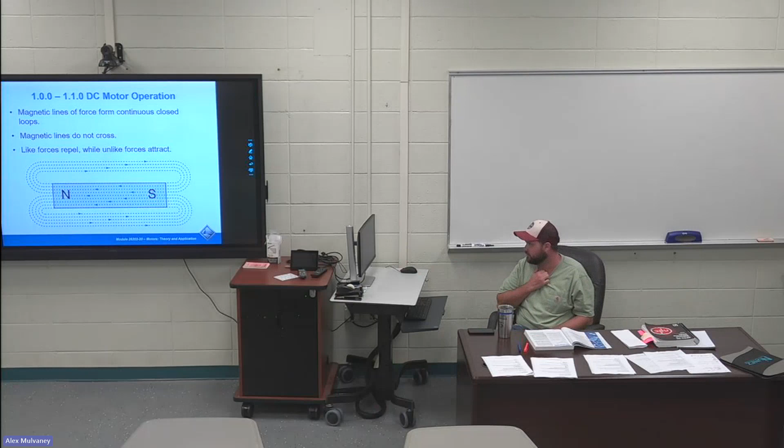Pretty much, motors are pretty much electromagnets arranged in certain ways to create a spinning energy. It's essentially all that they are, and they've just come along further and further with how they're made. How they're made has been the same for a while, but they're becoming, especially DC motors, more and more efficient. But definitely super important in industry and stuff. I don't see you guys rebuilding motors, but it is important to know the components and characteristics of how they work.

On page 1, I don't have any of the trade terms highlighted, but if you look through there, those are a lot of the things that he talked about. You should know that armature is another name for the rotor, the part that actually moves on the inside of the motor. Commutator is what connects the electricity to the motor, essentially, with the commutator and the brushes. All motors are going to be rated by their horsepower. RPMs are important, you've got to make sure you get the right type of motor. And then he talked about rotation.

My only highlight on page 1 is 110, how DC motors operate. Third paragraph is highlighted with the second bullet point: there are several characteristics of these magnetic lines of force that must be remembered when dealing with electric motors. They are the following: magnetic lines of force do not cross.

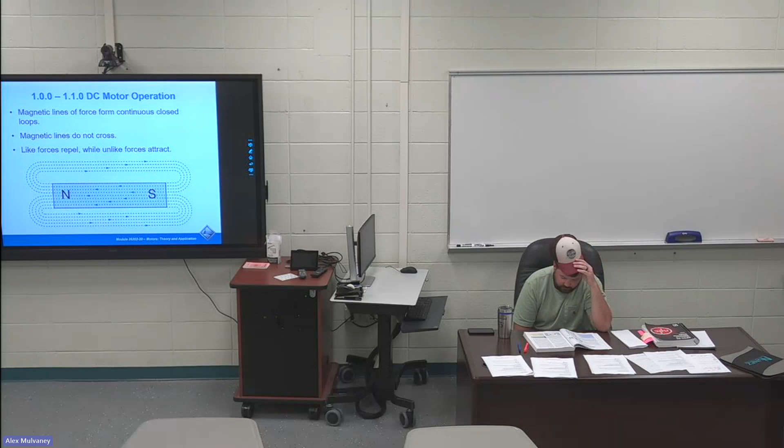How is the armature, at least in the video, made up of? What was it made up of? Laminated sheets. Why were they laminated? To stop eddy currents. Not to stop it completely, but to limit, reduce it to a smaller area. Eddy currents are a pure loss — that's one of the losses of an electric motor. Electric motors are super efficient and stuff like that, but that is one of the losses of an electric motor.

Page 3, I've got the first sentence of that note highlighted: the brushless DC motor was developed to eliminate commutator problems in missiles and spacecraft operating above Earth's atmosphere. So usually that type of technology trickles down — they started with NASA and stuff like that. Anybody know any other inventions that trickled down from spaceships, or not spaceships, like NASA or anything?

GPS. I mean, that's part of it. Satellites. So even simple stuff like Velcro is NASA. Like that's a big one that just trickles down into stuff.

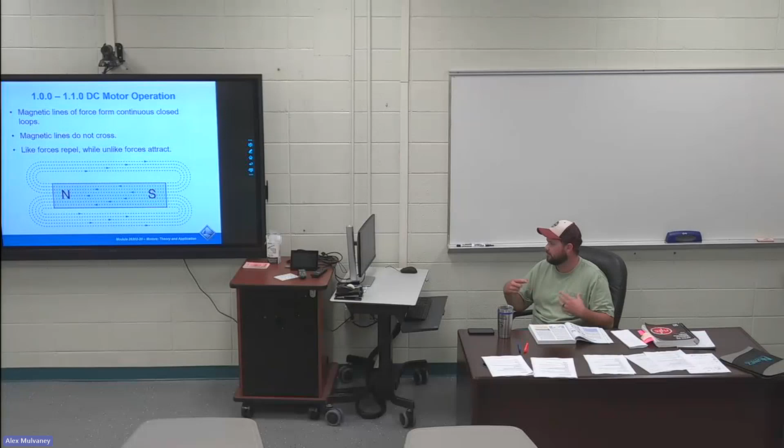But yeah, definitely brushless DC motors are a big thing because, like it showed, brushes are connected to the commutator, which is connected to the slip ring, and those were made of a carbon material. As they hit those grooves, that wears them out over time, and they can be replaced. You usually find by the time somebody decides to replace them, there's nothing left and there's damage to the commutator, but they do have the ability to be replaced. But brushless DC motors are probably what everything's heading to, at least on the smaller side of motors, within the next decade.

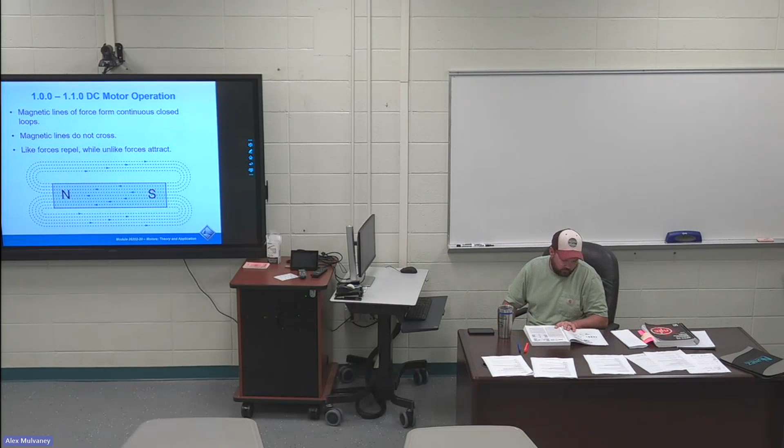Flipping over to page 4, you can see the different types of brushes. If you're looking up on the board, you can see how they all have a radius on them in order to touch the commutator segments, and then a spring with a wire on it. So this is what the actual electricity is flowing into and out of for the motor.

You can have your commutator segments. They had just 3 different segments, but you can have multiple different segments, like the video said. The more you have, the more windings you have, the smoother the operation is, especially if you're running at lower RPMs. But they usually have some form of spring. I've seen this mechanism mess up before, and this is a hard one to fix. Some of this is kind of little flimsy metal. The spring is different on most of them that I see.

All it takes to change the brush is to take this little clip off, move the spring, and the brush pulls right out, and you can change it. But there's different types of brush holders. This is the clamp type, which is usually the type that, at least that I've seen in motors, but it's usually all smaller type motors.

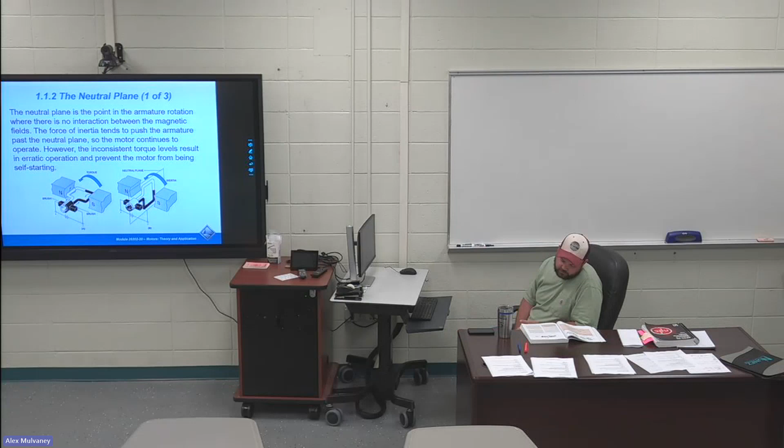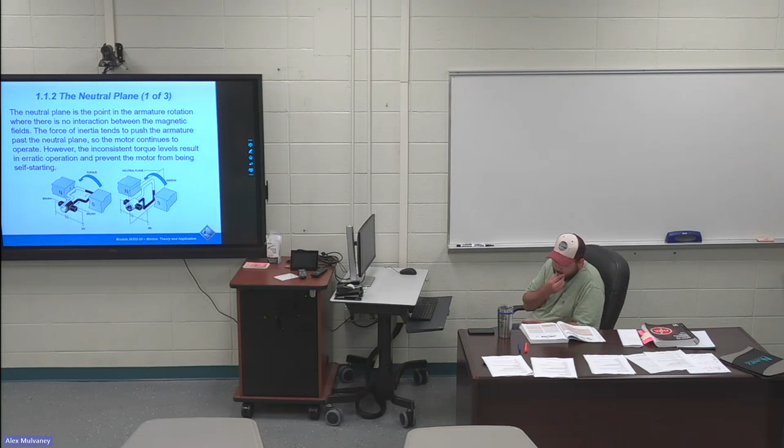Counter electromotive force, CEMF. Second sentence is highlighted in 114. The magnetic field is produced by the field poles, and a loop of wire in the armature turns and cuts this magnetic field. So on the video, they just had a north pole and a south pole magnet. Other motors have multiple magnets, not just on the horizontal, but on the vertical plane as well, to keep that thing spinning. But yeah, it's just talking about the field poles, magnetic lines of force being set up for the motor.

Page 8 and 9, they go through kind of what he did. I don't have any highlights on either one of these pages, but it goes through and talks about the lines of flux and which way they're pushing. And then once you start running current through the armature, it forces the motor to start spinning and things change. He did a good job of going through that, but you can see right here, they're starting in the neutral plane, but as soon as that armature turns, you can see these magnetic lines of force are changed. It's crazy. Even watching it go semi-fast on the board, that is a minuscule fraction of how fast this stuff happens.

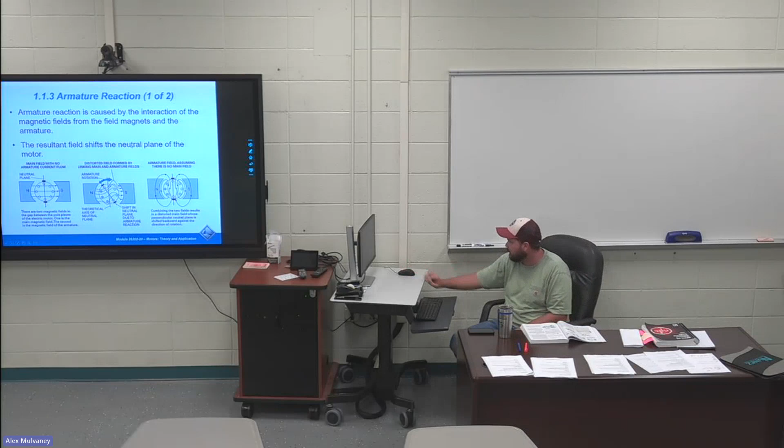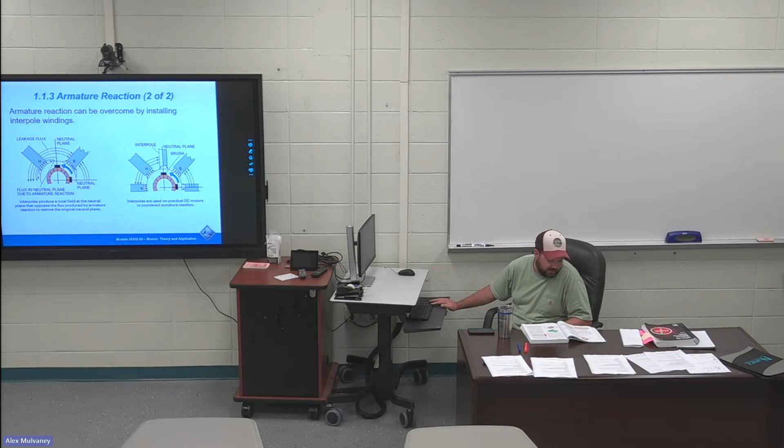Moving on to page 10. One equation that is important is horsepower. Figuring out horsepower, I've got horsepower equals watts over 746. So if you're wanting to convert your electricity into a horsepower number, you can take your watts divided by 746, and that gives you horsepower. 1 horsepower is 746 watts.

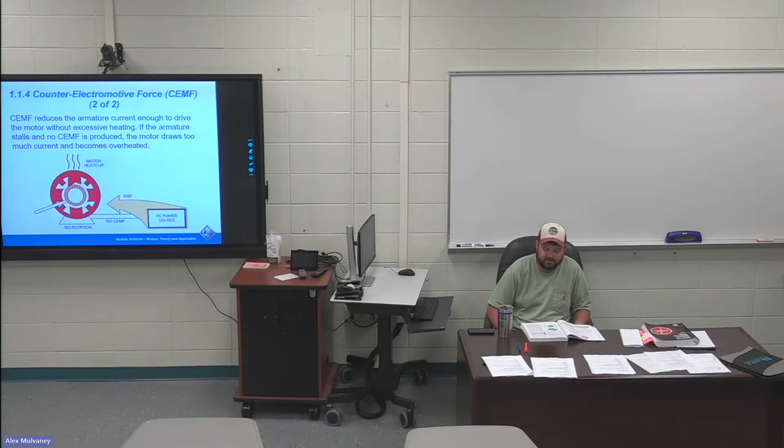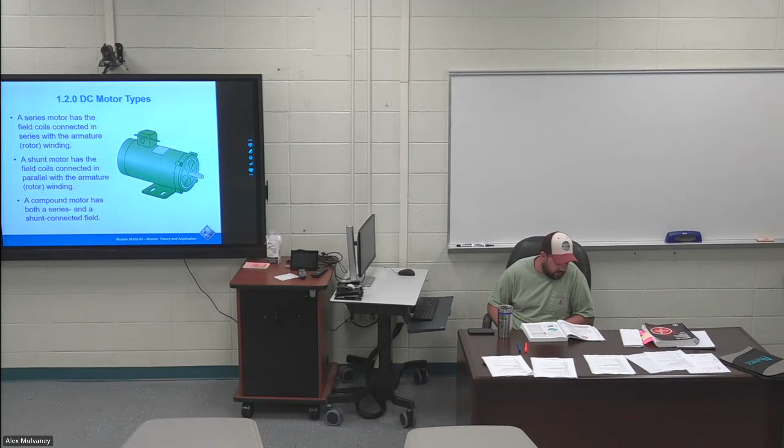DC motor types, a bunch of different types, and the different types vary on how the motor windings are wound inside the motor, how the armature is set up. There's different advantages and disadvantages based on how this is done. Page 10, DC motor types, third sentence is highlighted. The shunt motor has the field coil connected in parallel with the armature or rotor winding.

Pretty much means there's a big coil on the outside that's connected to the brushes and the commutator. Anytime you hear shunt in the electrical field, that just means a separate path for current to flow to create something. Because we know we add resistors and stuff to circuits to control the voltage in a series circuit, so they're doing the same thing. The main two things for a motor are speed and torque, so you can play with your speed and torque values by using a shunt DC motor.

It's not a bad thing to read through the operating characteristics of a shunt wound motor, because they're fairly common. But you have torque, speed control, and speed regulation. None of those are highlighted, but it wouldn't be a bad thing to read through. I have the last sentence on page 11 highlighted. This motor is suited to applications that require a relatively constant speed over a wide load range.

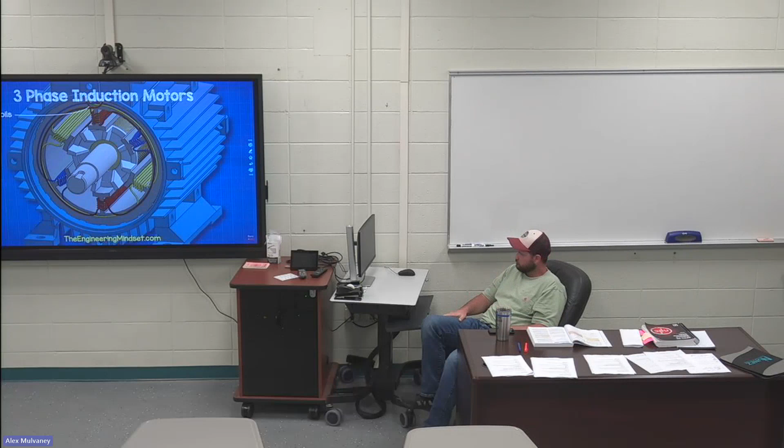So in a DC motor, the electricity is passing into the moving object itself, and then you just have stationary magnets on the outside. So the armature is actually, the electricity is actually pushed through the armature, and that's what makes it spin.

An AC motor is different. The electricity passes through the stator, or the stator casing housing, all kind of interchangeable words. The electricity is passed through that, which makes the rotor spin. It's important that in the AC motor, this is called the rotor, not an armature. So this is just a rotor. In the DC motor, it can be called either one, but in an AC motor, it's called the rotor.

Not important, but did y'all know in World War II they found spies by making everybody say the word squirrel? Squirrel. I just noticed it because the way he said it, like a lot of people in Europe and Germany and stuff like that can't say squirrel like we do.

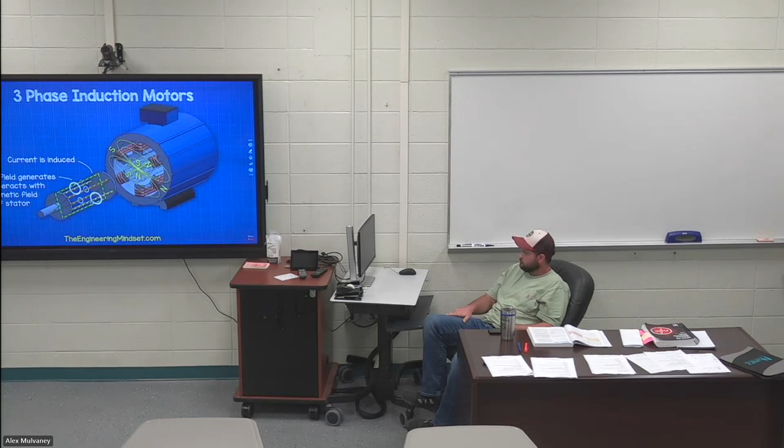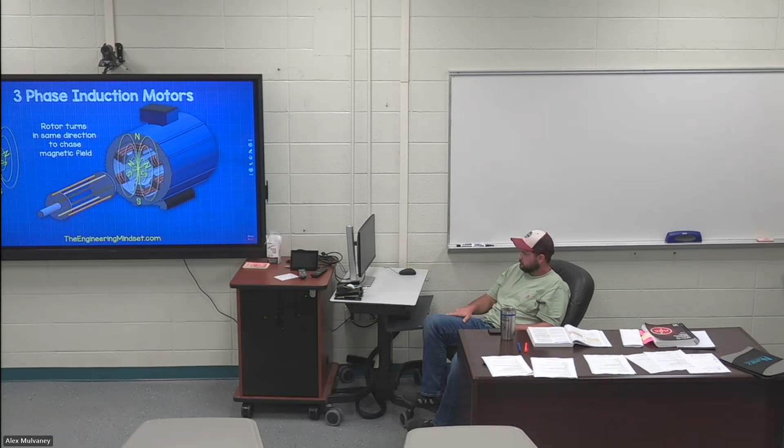So that's going to be important. Like it's always like if you see this arrow right here, this would be your rotor. And it's always like the rotor is trying to catch up with the north, like the end of this is going to be a south pole, and it's going to be trying to catch up with the north pole. But the north is shifting constantly, and it's never going to. The north pole is kind of pulling the south pole along the motor. It's kind of how it works.

And then just so you know, the speed of the changing north pole around the motor, sounds weird, is the synchronous speed. You can get synchronous speed motors to where it's locked into a constant speed, but we'll talk about that. But just know that the speed of the north pole and south poles changing around the stator is known as the synchronous speed.

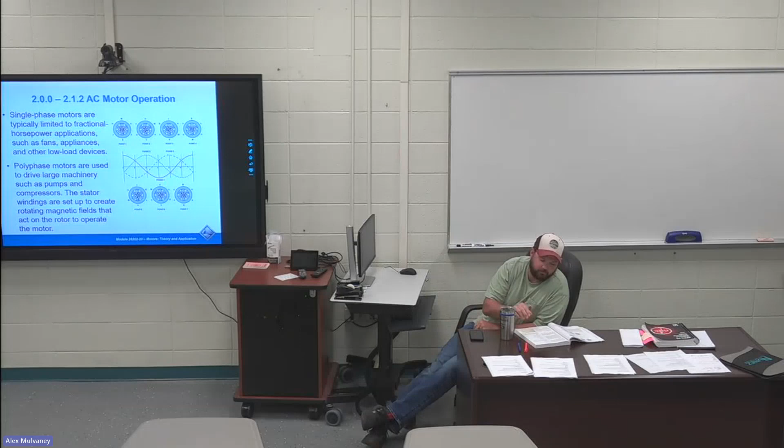Page 17 talks about different characteristics of motors: induction, torque, slip. The slip is the difference - remember I talked about synchronous speed and how the north magnet follows around and the rotor is trying to catch up with it. The slip is the difference between the two. I don't know that I have a highlight on that, but it's good to know the definition of slip. Not all the math on there that figures out what slip is - who cares? I don't know who does that math, but it's not important until some point.

I don't have anything else highlighted on page 17, or 18 and 19. Starting current, this is important - the starting current when you start a motor is the highest it will be, and it's a lot higher than at synchronous speed. So you have your graph on page 18.

The first, it's called locked rotor torque whenever you start up a motor, and that's just because the rotor is stationary. Until that thing gets spinning, the faster it's spinning, the more inertia it has, the easier it is to spin almost. But whenever it's dead stop, even starting with some type of load, whether that's a fan or pump or whatever on the end, that's where you get your highest amount of torque required, which means the highest amount of electricity required, the highest amperage. That's why motors trip out on initial startup sometimes, or it can mean a gearbox has failed with too much torque, or a bearing has failed causing that initial torque to spike.

But you can see starting torque right here - you have to have the most torque right here, and then once that motor speeds up all the way to its synchronous speed, it doesn't require as much torque. I guess it does talk about starting torque.

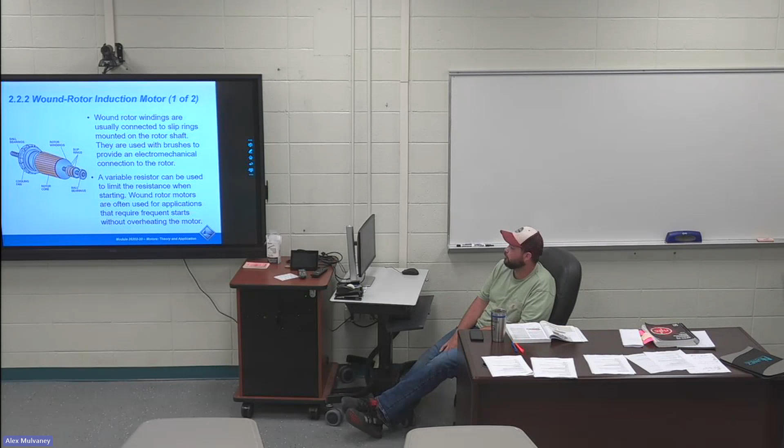222. Wound rotor induction motor. So a wound rotor actually has electricity that is injected into the rotor. And this is to change characteristics of the induced voltage on the rotor. My highlight on page 23 is in the top right of the page. That one sentence, you'll have a couple questions coming out of that one sentence.

In a wound rotor induction motor, the insertion of a resistance in the rotor circuit not only limits its starting surge of current, but also produces a high starting torque and provides a means of adjusting the speed. I'm wrong on this. You're not injecting current, you're injecting resistance to create higher starting torque.

You can kind of see how that's wired up right here. So you have the stator, which is constant. You have your rotor, which is wired up. This is slip rings, which, just being honest, I don't think I've ever changed out one of these motors. And if I had, all of this was internal, and I just had to wire up the motor like normal. But these are slip rings that are kind of like the part of the DC motor commutator. And then connected to different resistances to change your starting torque.

Next page, synchronous motors. Whole thing's highlighted, 230. The synchronous motor is a three-phase motor that operates at synchronous speed, which is 0% slip. From the no load conditions to full load conditions, these motors are used in precision applications. Nothing in operating characteristics construction. On the right-hand side of the page, second to last paragraph, first two sentences are highlighted. To allow this type of motor to start, a squirrel cage winding is added to the rotor to cause it to start like an induction motor.

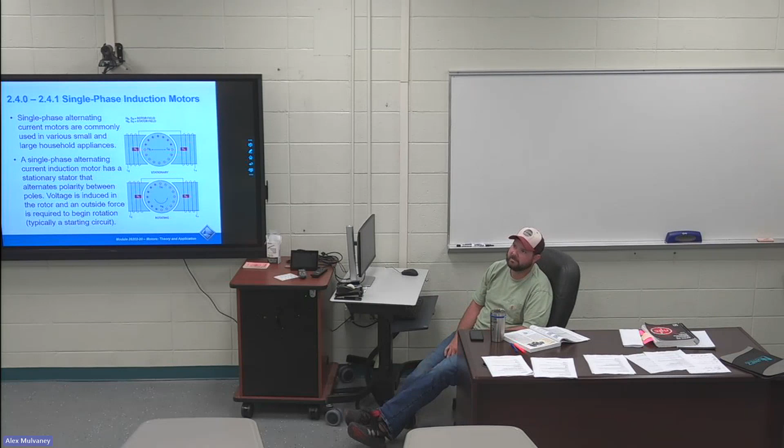240, a little bit different. Single phase induction motors, so also super common. Obviously, anything at your house that runs on motors, so your dryer, your blower, your fan blower for your AC, your disposal, all those use a single phase electric motor.

Which is the highlight. 240, second paragraph is highlighted. Examples of many applications of single phase AC motors today are refrigerators, freezers, washer dryers, power tools, copy machines, heating systems, water pumps, computer peripherals, and various small appliances.

You can't change the direction of a single phase motor. They are designed in certain ways to spin in certain ways. Switching the wires on a single phase motor does not swap the direction. They do have a different way of starting.

In order to get that synchronous speed started, to get that north pole right ahead of the south pole of the rotor, a capacitor is used. I think we've talked about capacitors being kind of like batteries. They can store an electrical charge, and then when you need it, it can kind of jolt. So it jolts that stator to switch positions, and then the rotor starts to try to keep up with it.

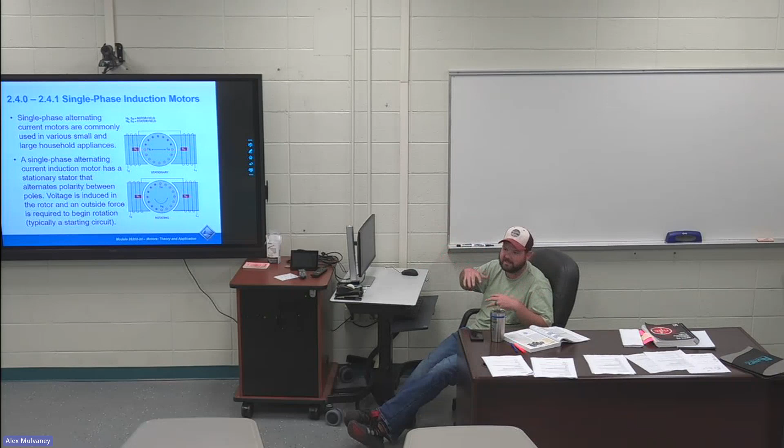Anybody ever have a fan or something that you've turned on and it sits there and shakes, and then you take a pencil and spin it and it'll start up? Y'all ever had something like that? It's fairly common, but usually what's happened is your capacitor's gone bad. Or if your air conditioner outside isn't working and they come and replace your capacitor, it's because the fan won't spin. You can take a stick and spin it, and you're acting as the capacitor, getting that synchronous speed started. Once it's going, it's fine, but it has to have that jolt to change the magnetic poles in order to get it spinning.

Split phase induction motor, nothing highlighted in that. Capacitor type induction motor, that's what I've been talking about. Flipping over to page 30. The first full paragraph, first sentence is highlighted. The net effect of the capacitor is to give the motor a starting torque of about 4 times its rated torque.

Nothing else highlighted on 30 and 31. Flipping over to 32, they talk about capacitor start and run.

Next type of motor is the shaded pole induction motor. Online test questions, second to last sentence before 245: However, it has low starting torque, low efficiency, and high noise level.

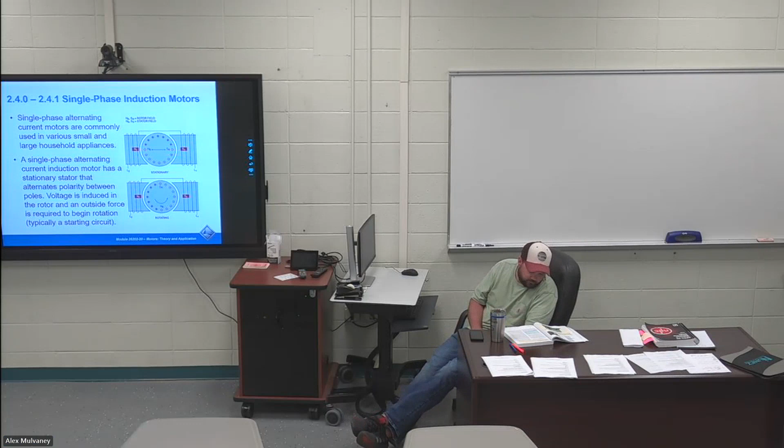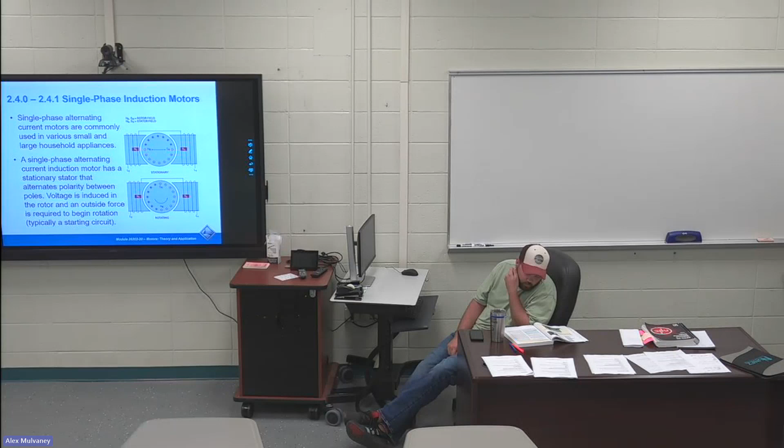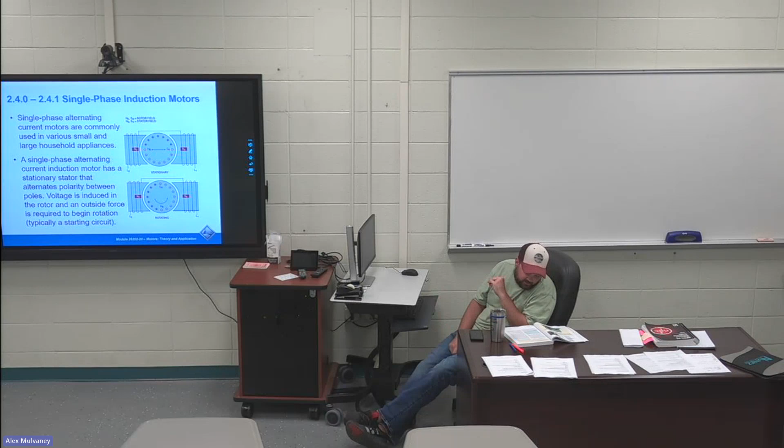Multiple winding motor, the first bullet point, the whole thing is highlighted. In a multiple winding motor, two or more separate windings are placed in the stator core slots, one over the other, as shown in figure 46. For example, a 4-pole winding can be positioned in the core slots and have a 2-pole winding placed on the other and arranged so that only one winding at a time can be energized. Key in on this last sentence. Switching speeds is normally accomplished by switching contacts that are in the motor controller external to the motor itself.

So that's like this one. You can connect 2 different windings. So one winding would be to start it. So that would be your 4-pole. That would be your lower speed, get more torque out of it. But like your equation, 120 F over P, once you reduce your denominator, that's going to increase your speed, right? So then you can go to a 2-pole.

Why would you not want to start with a 2-pole motor? Because it can be stationary, but it's going to be an insane amount of torque, an insane amount of initial current inrush. Remember when these motors start up, they can have up to 300% of their initial torque that's needed. So the lower amount of poles you have, the higher that torque and the higher the current has to be. So they'll go from 4 to 2, because once that motor's spinning, it's a lot easier to make it faster with a 2-pole motor rather than 4.

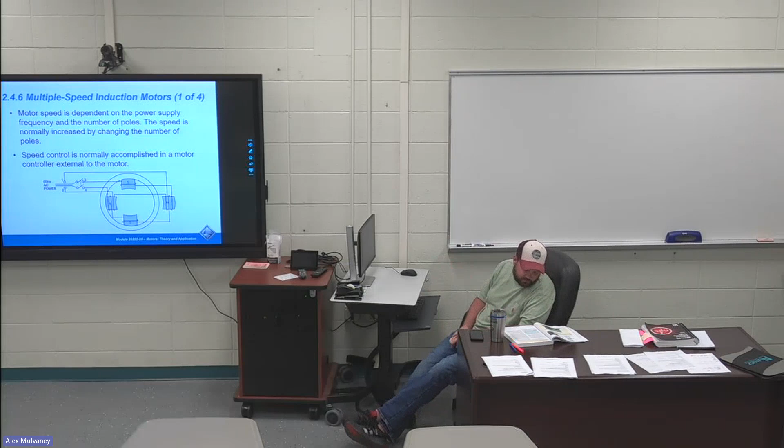Next bullet point, first sentence is highlighted. Consequent pole motor. Consequent pole motors have a single winding with 2 speeds. And then page 36 just shows the different 2 winding, 2-speed motor, high speed consequent pole motor, low speed consequent pole motor, and the single phase consequent pole motor. Synchronous motor. Looks old. You got 4 questions on page 38.

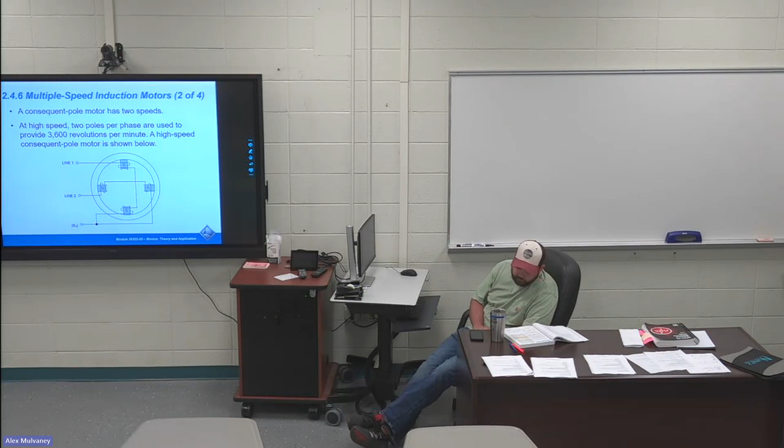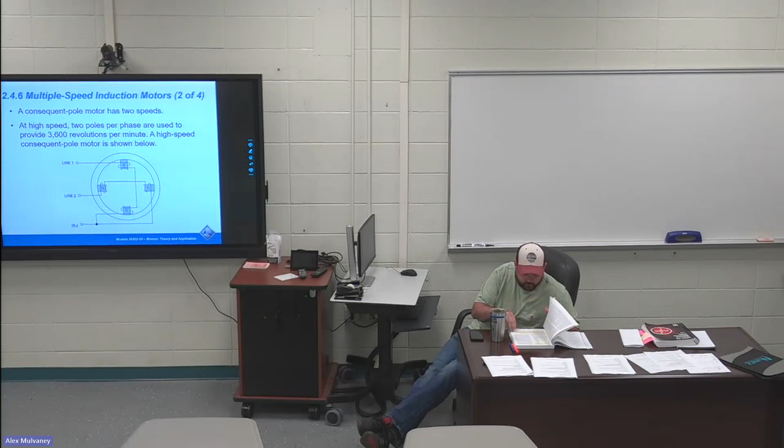I think we're through most of the harder theory stuff right now. So each of those 4 questions, take a few minute break. We're not gonna make it through this. Actually, we'll answer those 4 questions. We're gonna do one more section and then we'll take lunch.

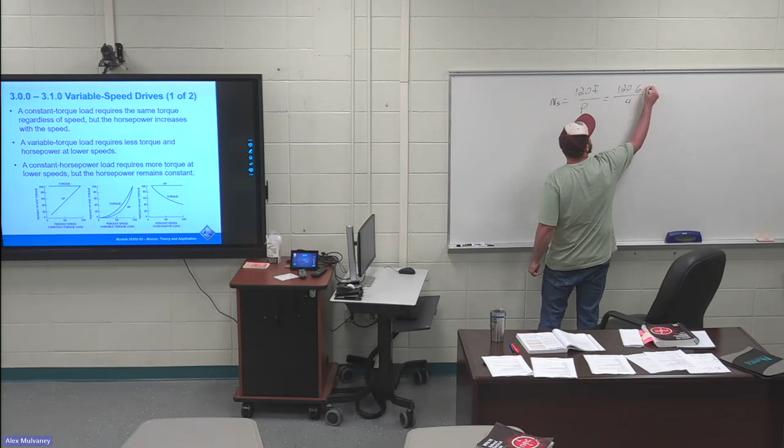Section 2 review, number 1, the motor has 4 poles and is operating at a frequency of 60 hertz. The synchronous speed is 1800. Synchronous speed is equal to 120 F over P. They gave us 4-pole and 60 hertz. 60 hertz is the frequency that we run in the United States, right? You plug into the wall, you're gonna get 60 hertz. At 1800.

2, the type of motor most likely to be used in a location with flammable dust and torque fluctuation. Squirrel cage induction motor. 3, a type of motor used in precision applications that require constant speed with 0 slip. Synchronous motor. 4, a heating system is most likely to use single phase induction motor.

Section 3, variable speed drives. So we'll go over this a little bit. I have a pretty good lab that you guys will do next time you're here. Samuel, I'll probably have you do it. That's electrical 3. Yes, sir. We have a pretty good VFD lab out there that runs through stuff, because a lot of people get confused. A variable frequency drive is very complex in how it operates, but controlling it is not that bad.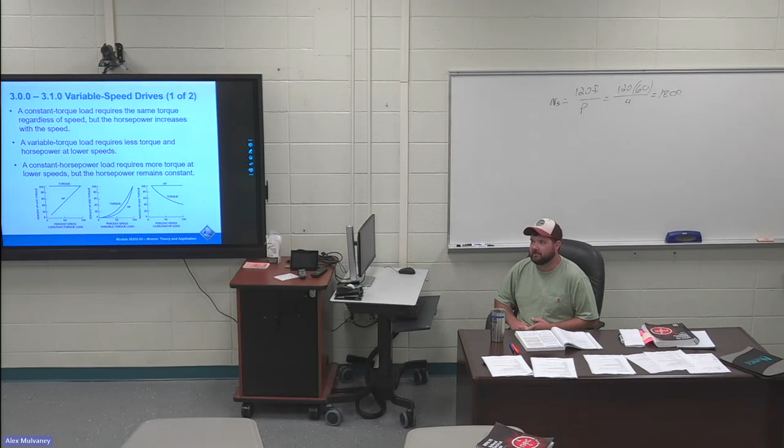It's got probably 40 different settings that you just have to turn on or turn off, like ramp up speed, ramp down speed, stuff like that. They're not super difficult, but they do have a bunch of different components. And if you get into learning how VFDs work, there are different sections of a variable frequency drive that do different things. If that makes sense.

3.10, adjustable speed loads. Right side of the page, second paragraph, first sentence is highlighted. For a constant torque load, the torque remains constant throughout the speed range, and the horsepower increases and decreases in direct proportion to the speed. Skip a paragraph, and the second to last paragraph on page 39, the whole thing's highlighted. A constant horsepower load requires high torque at low speeds, low torque at high speeds, and thus constant horsepower at any speed. It applies to applications such as lathes, requiring slow speeds for deep cuts and high speeds for finishing. Usually very high starting torques are required.

Page 40. They go through torque speed curves, which we talked about a little bit. I don't have any highlights in that. Motor heating. A lot of larger motors have heaters on them.

That's due to, you don't want to start stuff up cold, so you have heaters, usually 120 volt heaters on big motors. I mean, the motor heaters that I've seen, the motors are as big as half this room.

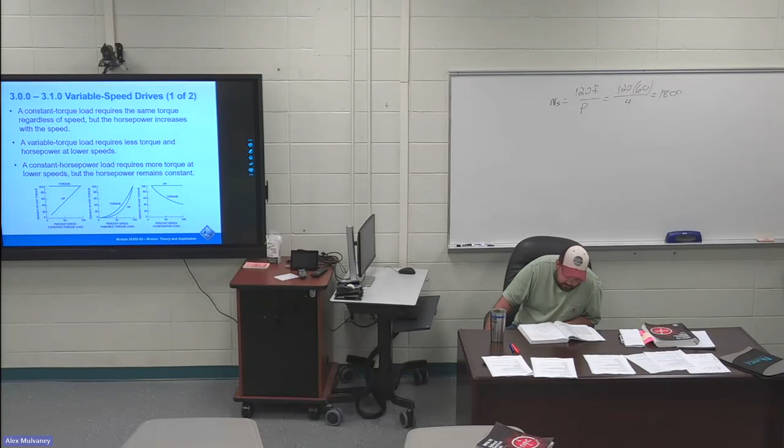My highlight in that is the second and third sentence of 3.1.2. A factor to observe is motor heating. When operating a motor at reduced speeds, the ability to dissipate heat is also reduced due to the slower cooling fan speed. That is not what I thought that was talking about. That is what I just said, it does not relate to what they're talking about. They're just talking about cooling off the motor.

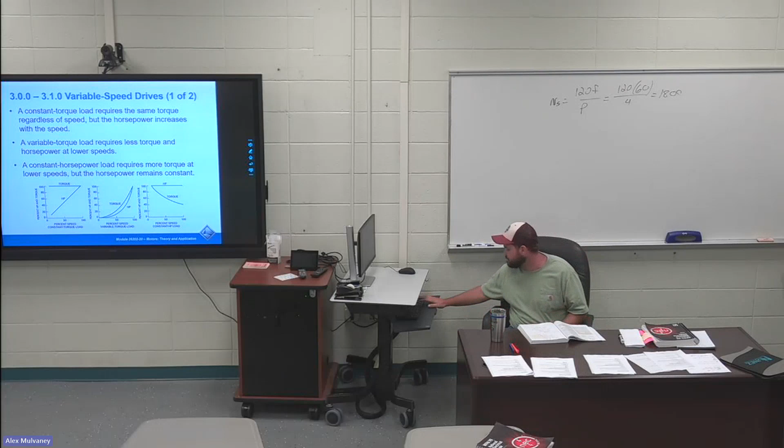So the motor has all those fins on the outside, which I don't have a picture of, but those are cooling fins. I assume we're going to talk about motor heating at some point, but this is just talking about the fan. You have to make sure the fan's blowing the right way. If the motor's super dirty, it's not going to cool as well. But yeah, you want a motor warm to start up, but you don't want a motor to get too hot because it's going to fry the grease that's inside the bearings and stuff like that.

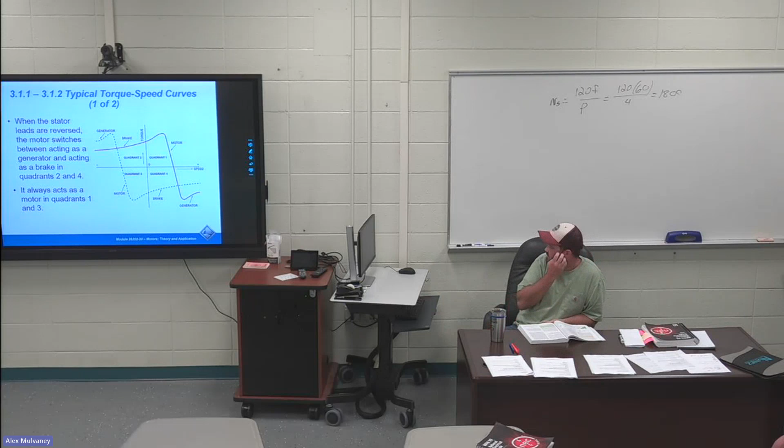Motor speed control. This is going to talk about AC and DC and switching back and forth between the two. Flipping over to page 42, varying the speed of a DC shunt motor. Second sentence is highlighted. Basically, there are two ways of varying running speed of a DC shunt motor. I have the second bullet point highlighted: adjusting the voltage and current applied to the armature. As the armature voltage is increased, the motor speeds up. This method is shown in figure 54C.

3.2.2, varying the speed of an AC motor, page 43. It goes through that equation again for your synchronous speed. Last full paragraph in the bottom left, the whole thing is highlighted. When variable frequency speed control is employed, the motor supply voltage cannot be allowed to remain at a steady value. The magnitude of the motor voltage must be increased or decreased in proportion to the frequency. That is, the voltage to frequency ratio must remain approximately constant. The voltage to frequency ratio is sometimes referred to as the volts per hertz ratio.

Going on to page 44, braking methods. We'll be doing braking methods on that trainer for sure. I don't know if it's this time or next time you're here, but I'll get y'all on the motor trainer. It's probably going to be next time.

But there's a bunch of different ways of braking without just using, a lot of times they just use a brake on the back end, like a friction brake. But there's ways of injecting electricity the opposite way into a motor in order to stop it. Sometimes you have like a Skil saw, you let go of the trigger, the blade keeps spinning. Nicer Skil saws, when you let go of the trigger, there's a braking method that stops the motor. So sometimes it's important to have different types of braking methods.

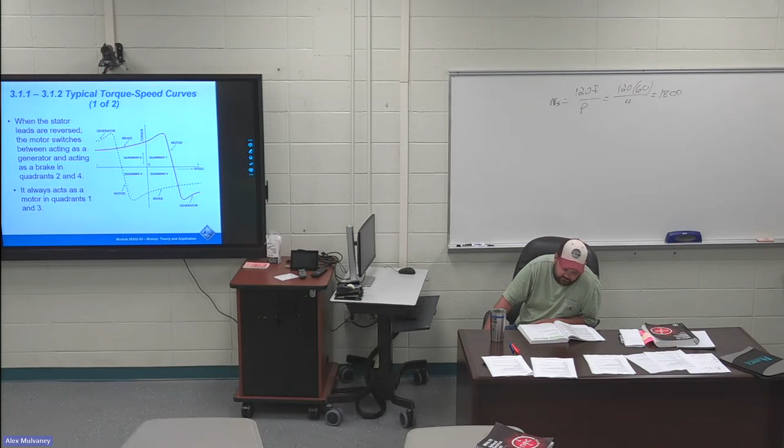Next paragraph, that short paragraph, the whole thing's highlighted. Dynamic braking of a DC motor may be needed because DC motors are often used for lifting and moving heavy loads that may be difficult to stop. For example, forklifts often use dynamic braking.

Everything on page 45 is highlighted, the top of page 45. The generated CEMF, you need to know that stands for counter electromotive force. CEMF is counter electromotive force. It decreases as the speed of the motor decreases. As the motor speed approaches zero, the generator voltage also approaches zero. This means that the braking action lessens as the speed of the motor decreases.

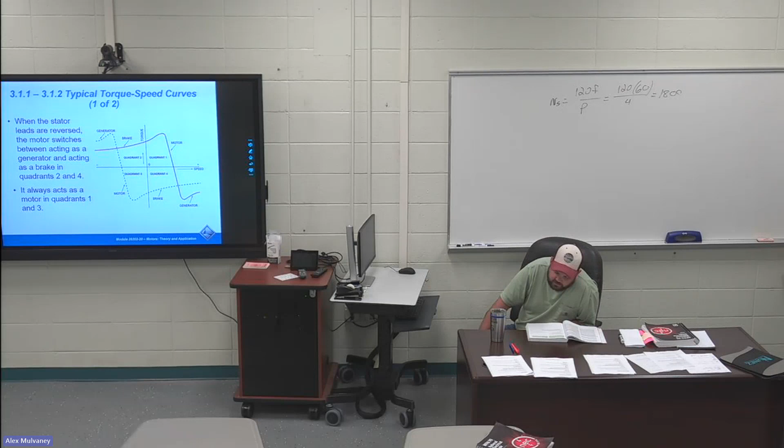As a result, the motor cannot be braked to a complete stop using dynamic braking. Dynamic braking also cannot hold a load once it's stopped because without the generated CEMF, there is no more braking action. For this reason, electromechanical friction brakes are sometimes used along with dynamic braking in applications that require a load to be held or in applications where a large, heavy load is to be stopped.

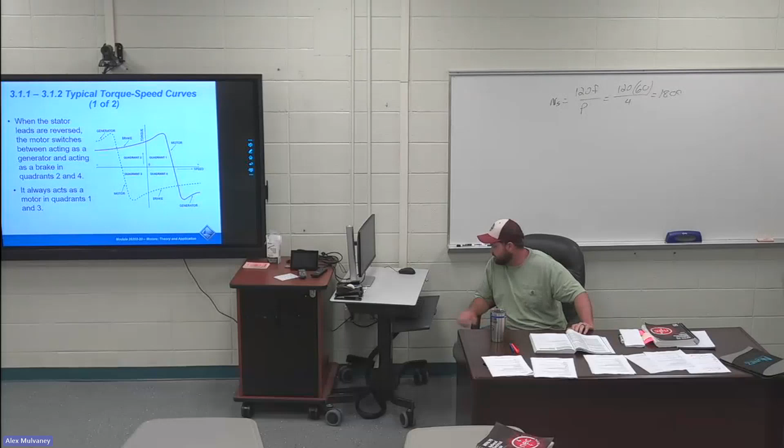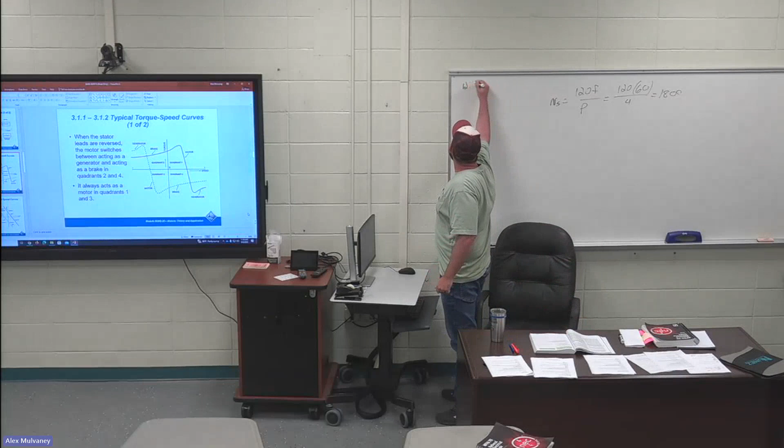All right, a little bit shorter lunch since I'm not giving you all as much to do. You just got 3 questions on the section review. It's 11:24, let's say 12:15. Go over that, 45 minutes. 12:15, be back from lunch.